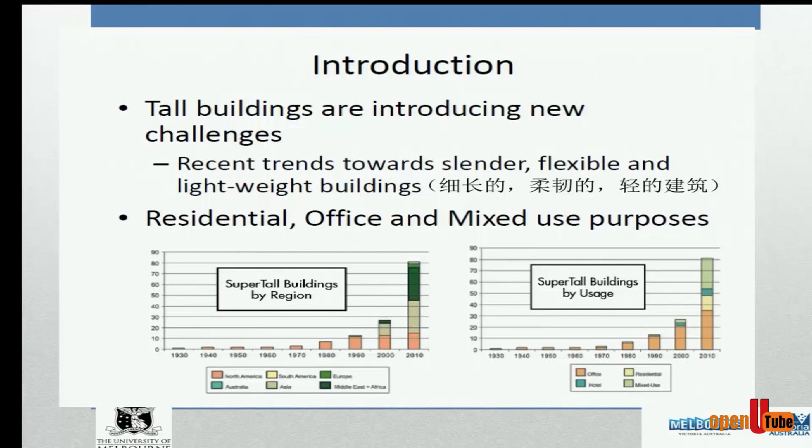The epicenter is moving from where the super tall buildings were in North America before, now it's more in the Asian region. Sri Lanka, we were told in Dubai, Mr. Jamal was also there when we attended the tall building conference, and we were told that Sri Lanka is one of the most active places for tall buildings. So we have to be very proud of it. The epicenter is changing by region.

Again, as a usage, I mentioned that we're moving towards more mixed use. We can't ask the client - maybe we have to ask the client what do you want to do, but then he will change his mind halfway. So anyway, the shapes and all that.

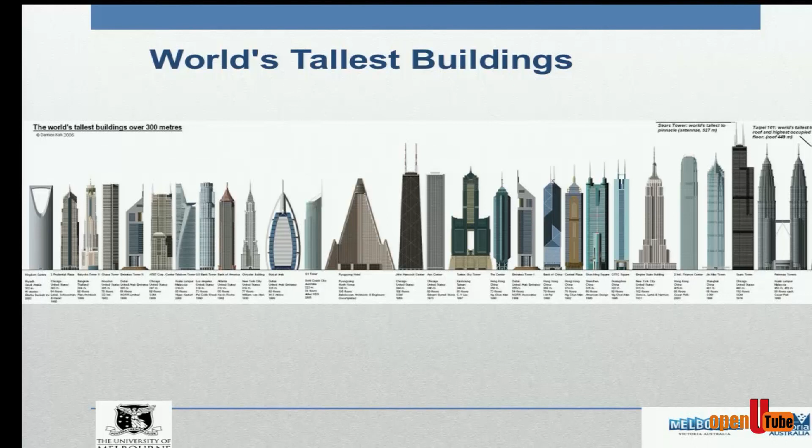World's tallest building, the Burj Khalifa - again I will show my involvement with that. And then the Shanghai Tower, you can see the shapes are changing, always changing. The main task for architects is first to say we want a building which has not been built anywhere, we have to be different. So the shapes have changed as well.

All this is important, where it's heading now. Those days, my first experience as a designer, early 90s, was a 200-meter building. I was a junior engineer, even the project engineer for the site, also in charge of the core. But that was early 90s, a 200-meter building.

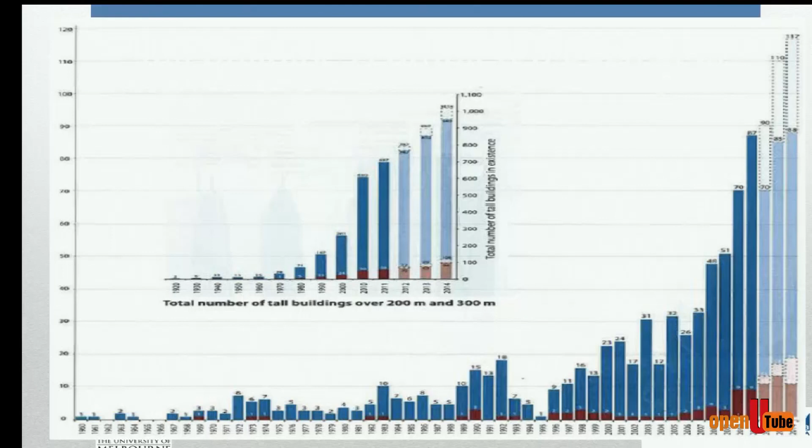But now the trend is 300 meters is really like the norm. People will be asking the question now about tall buildings - clients will be everywhere asking why not tall? Those days, the question was why design a tall building? It's the other way around now.

The clients are saying I want the tallest building which can be built, because there are numbers - these are business decisions. We know we're running out of space, running out of land, which is obviously getting more and more expensive. So the best way is to really go higher and higher. So it's not the designers asking can we build a tall building, but now the clients are saying we want the highest, because, sorry to repeat, it's a business decision - going taller is the best option, and your return is a lot higher when you go taller.

So Colombo, Sri Lanka - as I said, the skyline has changed so much in the last many years, and we have a huge opportunity here. Port City will be built, and there will be many high-rises coming up. It's an exciting time for the high-rise designers and the builders, as I said, for the students who are working in high-rise.

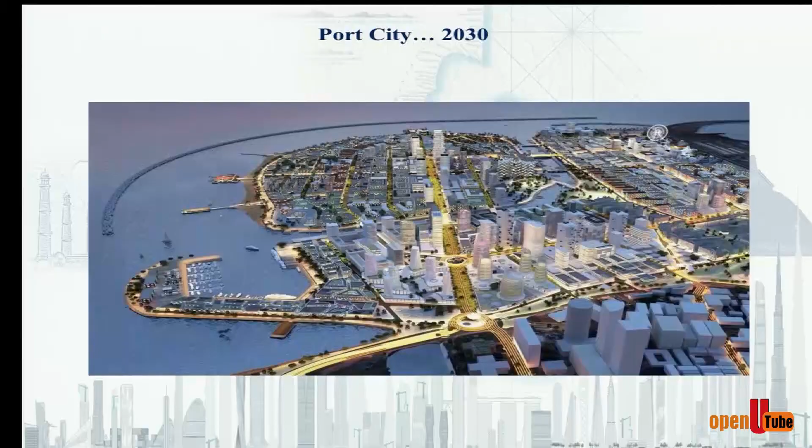In fact, I started the high-rise structures course - probably one of the first in the world. This is a long time back, mid-90s. As a junior lecturer, I started the high-rise structures course. It's still running, and the thing is, it's a special area - it's not really like going and learning concrete design or something. It's very important, but high-rise is again, for students and engineers around the world, a specialist area.

So no one can say that if you have not done a design of a tall building, if you have not done construction of a tall building, if you have not supplied materials to tall buildings, you can be involved - you need that experience. It's a specialist area. There are problems - I can't name them, I had a call 2-3 days back. I will ask you to look at the web and you will find it.

There was a problem in a building in Sydney a few days back. Again, because it's on the web, I can't name it, but I'll leave it as an exercise to find. The whole building was evacuated because there was a failure. It's dangerous - if you don't do that properly... maybe I'll stop short of saying why I was asked to be involved, but anyway, these are really very important to figure out, and it's going to the courts, big things happening there. If you look at the Sydney high-rise failure of a building, you will see that.

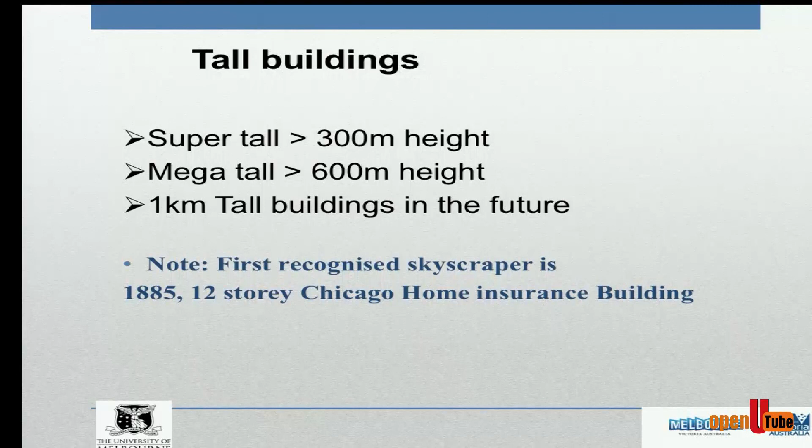The first recognized skyscraper, in 1885, was the 12-story Chicago Home Insurance Building. I remember growing up in Colombo, the tallest building was the Ceylinco Tower, and we used to go say, this is the tallest building. There may have been a lift, I'm not sure, but going up the escalator was something we really enjoyed. We had to pay for it at that time, going up the escalator, but now it's free. So the goalposts have changed all the time, and they will keep on changing.

I had an archive photo from Melbourne of a tall building, a 2-story building from around the 1840s, which at the time was considered a tall building, just 2 stories. So we can see how the goalposts have changed.

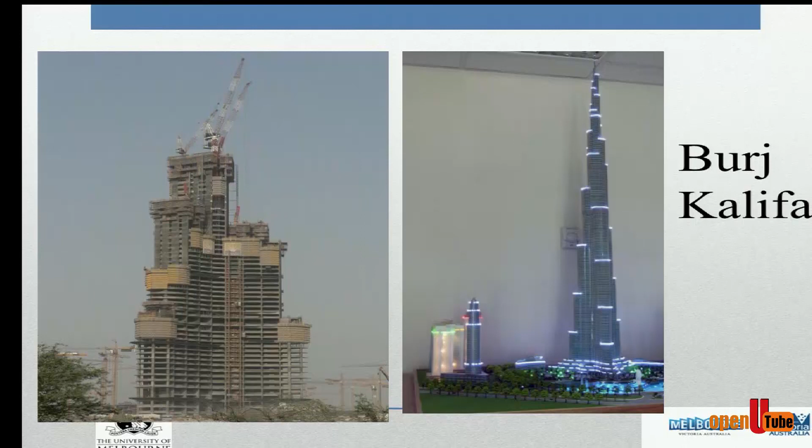Burj Khalifa is really a structure which changed a lot of things, and we were privileged to meet some of the people involved in Dubai a few weeks back. Then there's the Shanghai Tower, the second tallest building in the world, which brought new techniques like computer parametric design. It's twisted at every story to get the best performance from the wind, and some new techniques have been found. These are the 3 buildings I like the most in the world: Jinmao Tower, the Shanghai Financial Center, and now the Shanghai Tower. It's 630 meters tall, twisted, with some special features.

I was there when they topped up the concrete. A friend of mine was the project director there. The communication I had with him before was about this: I think it's one of the tallest pumps of concrete, you can't see it, but 506 meters. So that exercise, I was there when they were pumping concrete to the top level. It was really good to see all that.

Because of limited time, I'll move to this now. The design approach has changed. In those days, we had the material supplier giving us concrete and saying, yes, we'll try to pump this to 500 meters. Now it's different, we work by looking at the performance required from the material, and then we design the material accordingly. In this case, we wanted to pump the concrete to 506 meters, that was the performance criteria, and then you work backwards to come up with the best mix.

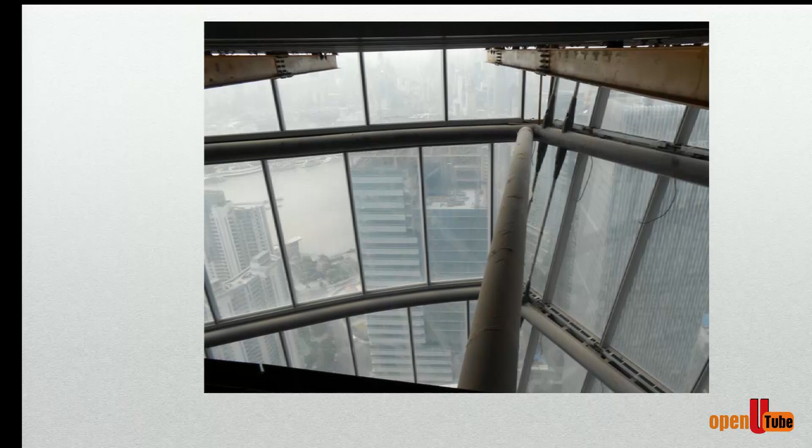Another feature is the double facade, which is becoming popular, not just a single layer but double facades, for thermal reasons and others, easier to clean, and even aesthetically considered better. We had a big research project on double facades over the last 5-6 years at Melbourne Uni, sponsored by Permasteelisa, the biggest facade company.

I've noted down, because of limited time, I don't want to take all the time, so I'll just summarize the areas where we have progress, where the world is heading. I'll show some slides later on wind engineering, aerodynamic shaping, and virtual wind tunnels, that's one direction we are heading. The world has changed over so many years. Fire engineering is also key, and that is currently restricting the height of buildings.

If you give it to Mr. Shomal, he'll design a 2-kilometer building if you want. We've got the foundations and the techniques to do things, but it's really the fire engineering which would restrict the tallest height. So I'll give some comments later on.

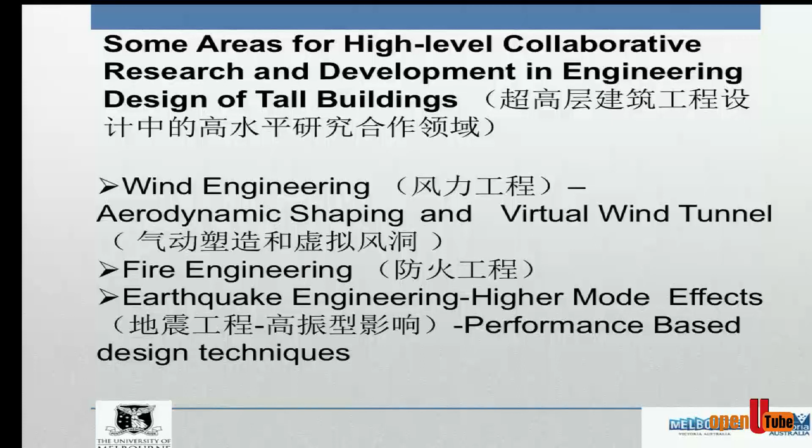Earthquake engineering, higher mode effects are there - if there are any questions, I'm happy to answer, but the higher mode effects have to be considered. Computers have allowed us now to really use performance-based design techniques, so there are recent developments covering that.

At the construction site, advanced formwork systems are coming. We also want - that's where I'm leading this center in Australia, the Modular Construction Center - and that's where the world is heading in the next 10 years. A lot of things will be prefabricated in the factory, so I'll say a few things there. And the vertical transportation systems have to really have some modifications.

Advanced materials - as I said, we are designing the materials, high performance, high strength, working on changing them. We need to change the design codes, because this is totally different.

The Australian code, which I have been involved with, I think I've become one of the most senior members now in the code committee. I introduced high strength concrete to the Australian code. At that time it was only 65, then we brought it to 100, and now we went to 120. Next revision, we're trying to go to 150 MPa concrete.

And so then we need the composite materials. Again, as I said, design the materials - we don't need to worry about whether it's concrete or steel or composites or nano materials. Just get the best out of the material. It can be a hybrid material that gives the best performance for the structure, rather than worrying about whether this is a concrete building or a steel building.

There are other issues as well which I won't spend time on now - we need to increase the lift travel. There was some discussion in Dubai this time at the conference.

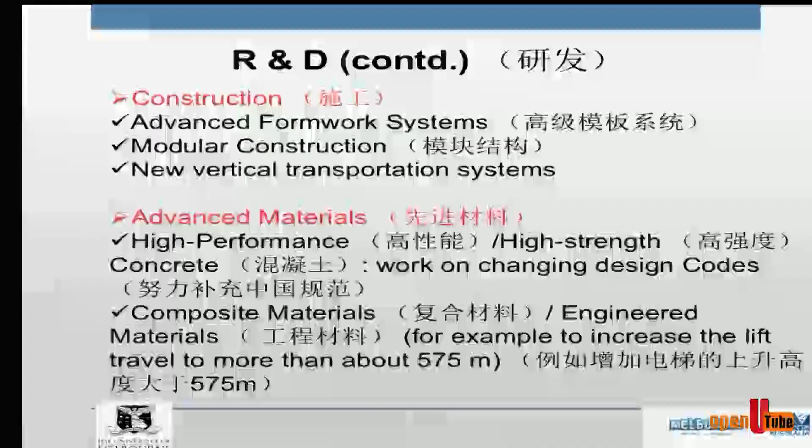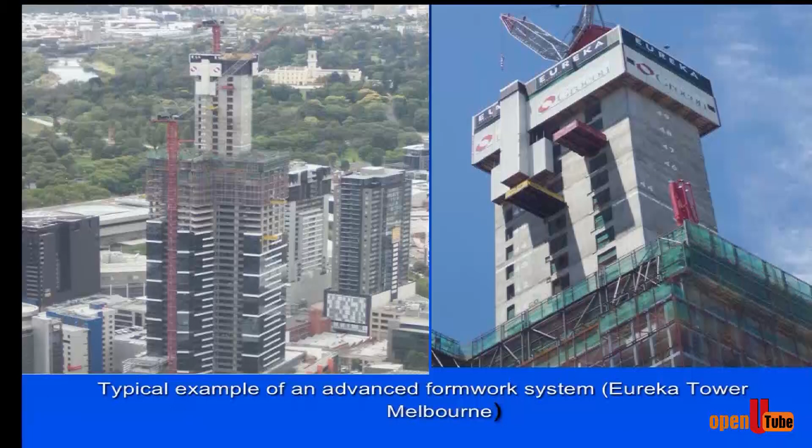Let's go through very quickly some of the innovations - new formwork systems, Eureka. Again, I was involved from the beginning, though I'm not the one who innovated this system. We had to make some adjustments for the design - it jumped 2 stories, before it was only 1 story.

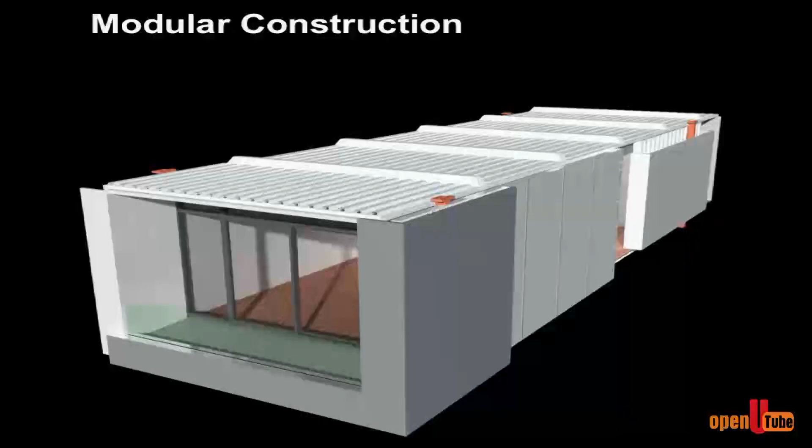This was the first in the world to really go into this, looking at advanced formwork systems. Modular construction, as I said, the world will become prefabricated. Again, we had a short course on modular a few days back in Colombo. It's like the best engineered product in the world is a plane, if you set aside the rocket. What we are doing now with buildings, we are following that.

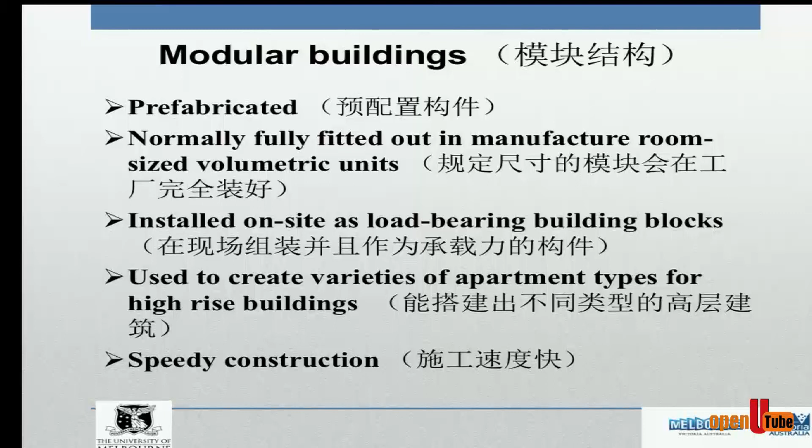It's a product-based approach. In the future it will be done in a factory, brought to the site, and put in on site - this maintains the quality, and that's the advantage of modular buildings. It's all prefabricated in a factory, normally fitted out as manufactured volumetric units, then used to create varieties of apartment types in high-rise buildings, with speedy construction. Construction speed is key now for everything, and modular really brings that.

Just one example - I was very privileged to follow this from the beginning, the construction of this 44-level building with 206 apartments, and these are the modular units. These modular units were done in a factory, and I gave more details in that short course, but today will just be a summary.

The modules are now designed and broken into modules, done in a factory. See, these are the modules. Weight is a key factor. Even the bathroom pod is done in the factory and then put in there.

An advantage is there were rollers here, so there was some flexibility for the architects - they could change their mind and say, I want the bathroom here. So these sort of new things are coming up, very interesting. Again, I'm privileged to lead the main center in Australia - I think it's probably the only one in the world, an academic institution focused on modular construction.

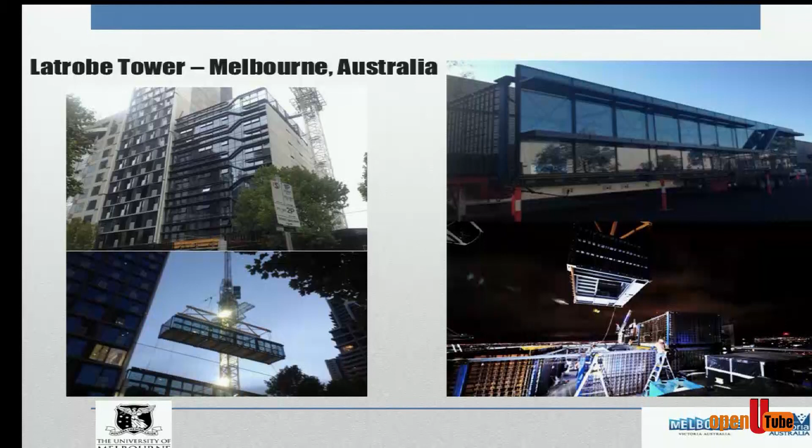So this is the Latrobe Tower brought from the factory. They got special permission to do it at night because transportation is key. I'll show a very quick video of that rather than trying to explain this technique.

Hickory, the company, is very innovative, and they are helping in the center as well.

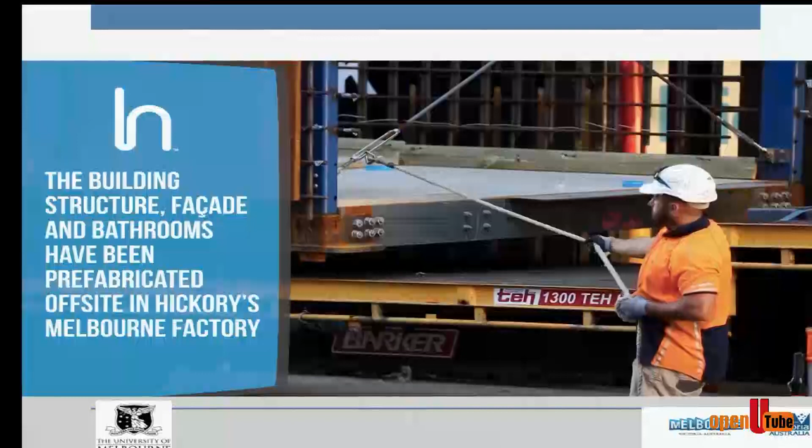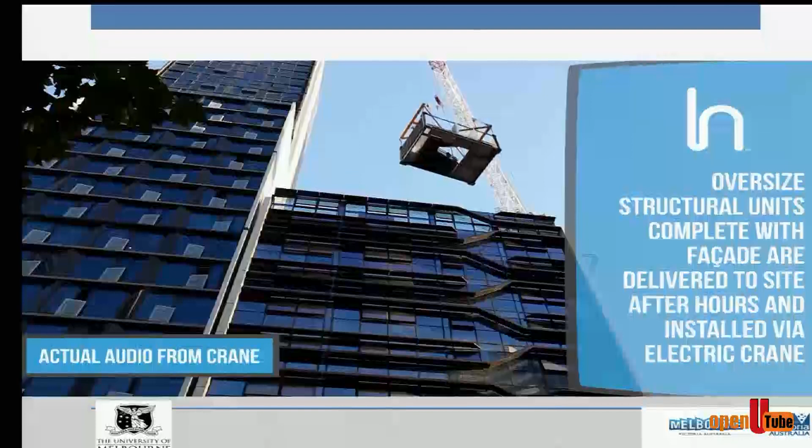So it's really very, very quick construction. Just to save time, I will expedite a bit the video.

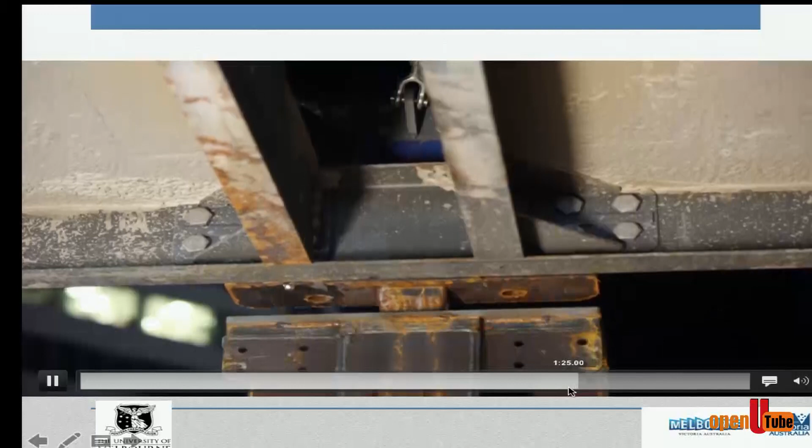It's very clean around the site, and it's done very quickly. There was a next door building we started long before with traditional construction. This beat it by so many months. So it's really picking up a lot, and this will be very quick. Again, a video of the time-lapse video.

Be very quick of the construction, which really brought some innovations.

And there's no disruption to traffic, or very much less disruption, and as I said, it's done mostly at night, and sometimes there's no interruption even to the people working in other places next door.

This again is a prediction I have made, and I think in 10 years' time, the majority of production will be done in a factory and brought into site around the world. So that's a major trend.

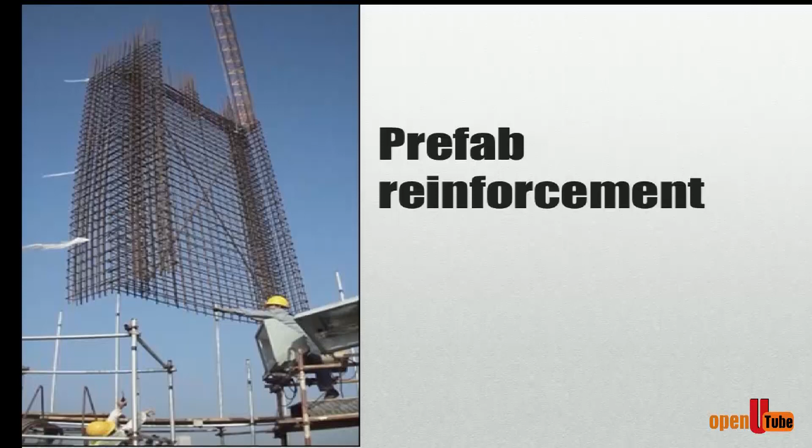Mr. Shomal told me Captain Kuratna used that in the Celestial site for the first time. I think it could be the first time in Sri Lanka. We used that, and to say the Chinese builders didn't know - I remember myself and Mr. Shomal talking to them in Beijing, telling them you can save a lot of time and go for prefab reinforcement, and I think they really adopted it and acknowledged that we helped them make it.

Anyway, other ones I will go through very quickly. These are some of the things.

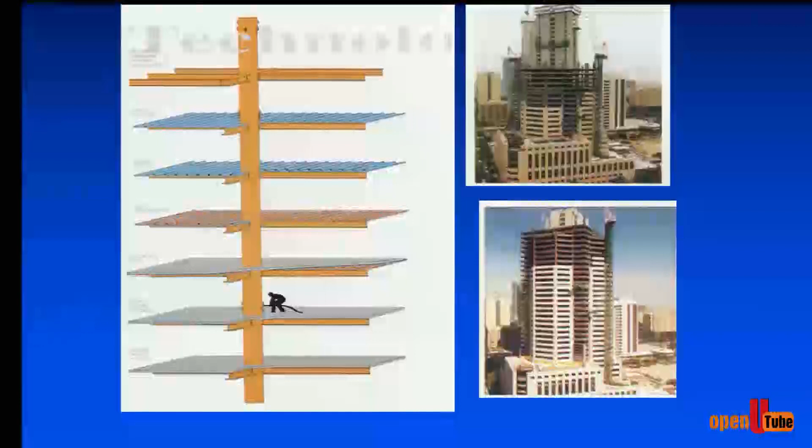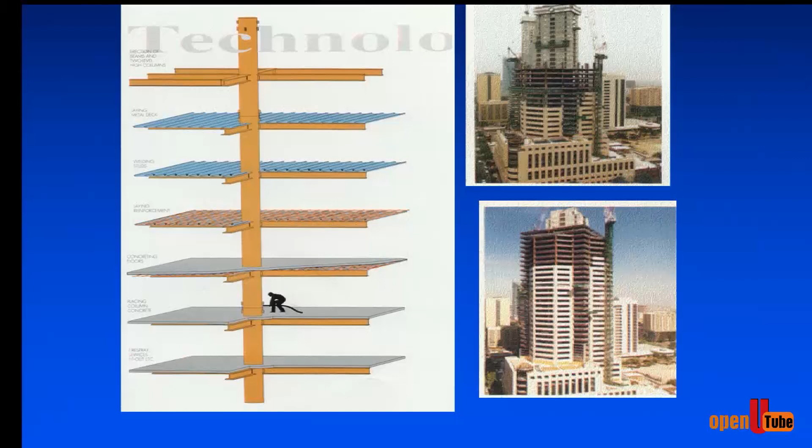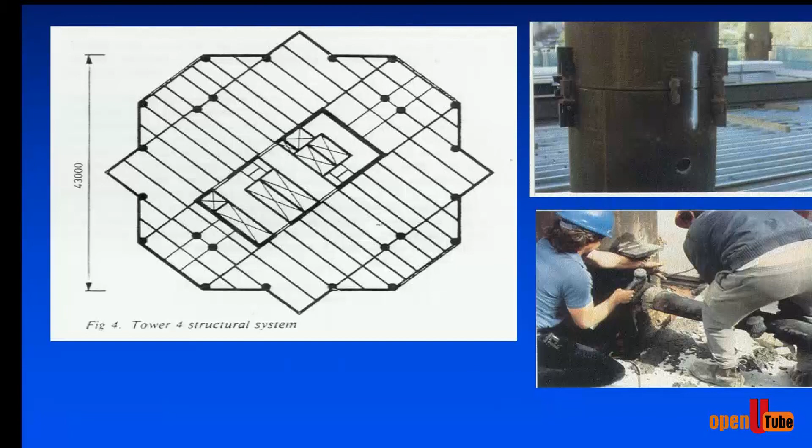In the early 90s, I designed these composite columns, came up with a system to pump concrete from the bottom four stories up, and that building is one of the major buildings, the immigration building in Melbourne. These are the beginnings of all that, still the composite columns, and at that time we didn't have all the technology - we were just wondering whether we could pump four stories up from the bottom. Somehow we did that.

And other things are coming up. Very briefly, cranes - they have to be very carefully designed, because what happens is you design the structure, and then sometimes they want to join the crane at different locations. They change all the time, so you have to be very careful about that.

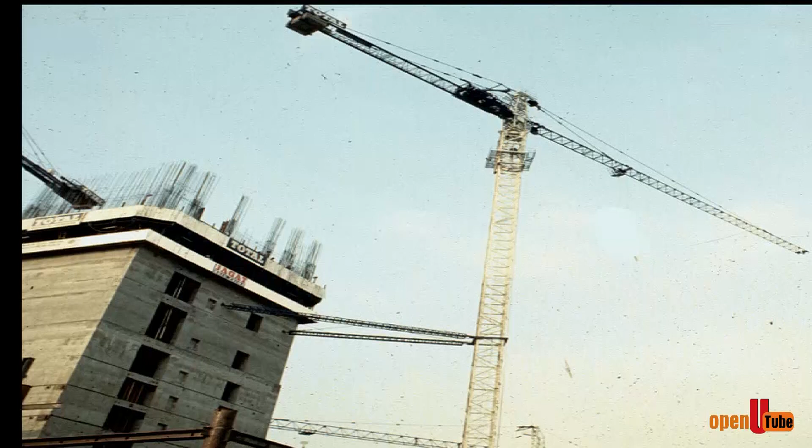Why I put this slide is the crane technology is changing. In a few years' time there won't be any crane drivers. I don't know about Sri Lanka, but crane drivers earn more money sometimes than engineers, because they have the height allowance, the risk allowance, all that. But what's happening now in the world is remote control cranes. Already that technology has come - mobile cranes with no operators. So safety is there as well, and that's what's going to come in crane technologies.

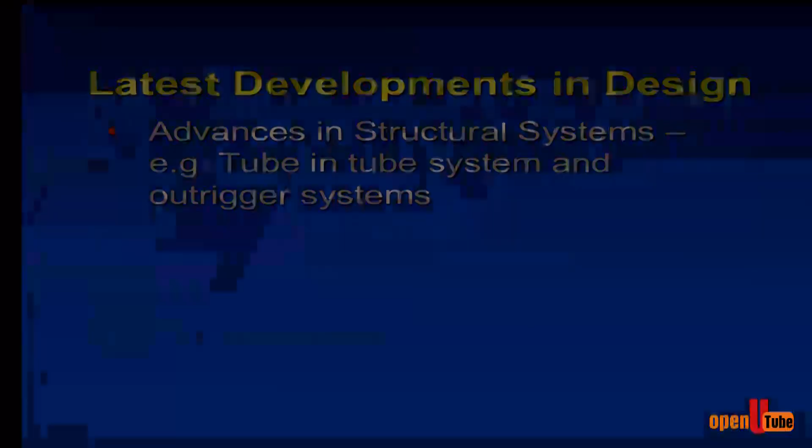Again, the latest developments in design - I will not spend time on this, but the outrigger system has been designed here. It's really a simple technique: one plus one is more than two. If you have one element here joined with another, one plus one is more than two. It doesn't work with people sometimes, but at least in this structure it works very nicely.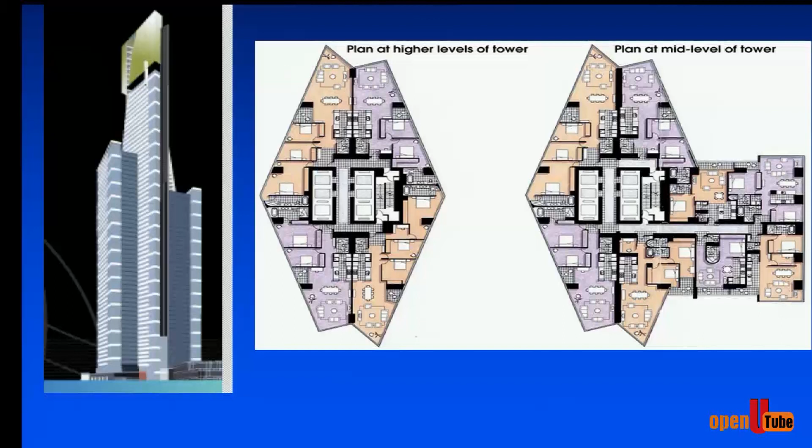So it was used architecture, that shows the importance of integration - that's another thing happening in the world. Building information modeling has facilitated the integration of the disciplines - architecture to the engineering disciplines, structural to mechanical to building services, all that together. So integration is key from the beginning.

The improvements to concrete technology is close to my heart, this subject where, as a very young engineer, I worked on a foundation. I consider him as my mentor in the technology - Ken Day was one of the best in the world. He designed the concrete for the foundations, and he got me involved in that.

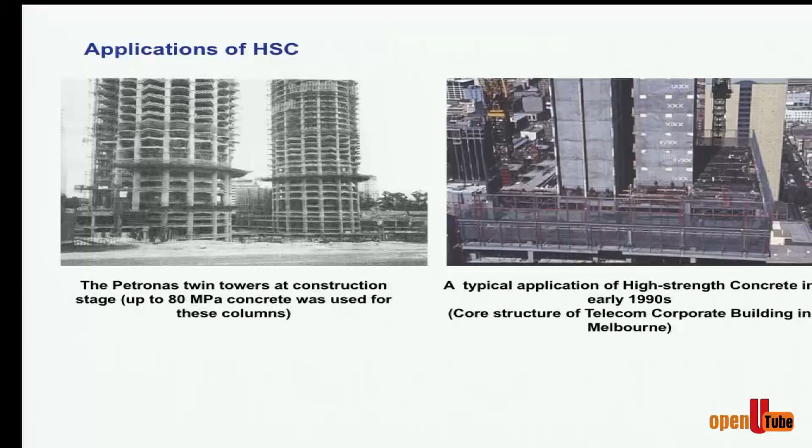As a young lecturer, we were doing some tests - so really early days, 80 MPa concrete. I was acknowledged last year, getting that award, as the first person in Australia to use high strength concrete in this particular building. I used 65 MPa as a young engineer. These are very proud moments for me.

And then getting to the Burj Khalifa, which is really the work of R&D - that's really for academic. The most proud moment is if we can use our research and then have it used in key buildings or key structures - that'll be a very proud moment. Using my work in Burj Khalifa to design some of these columns, the confinement work I did for a long time.

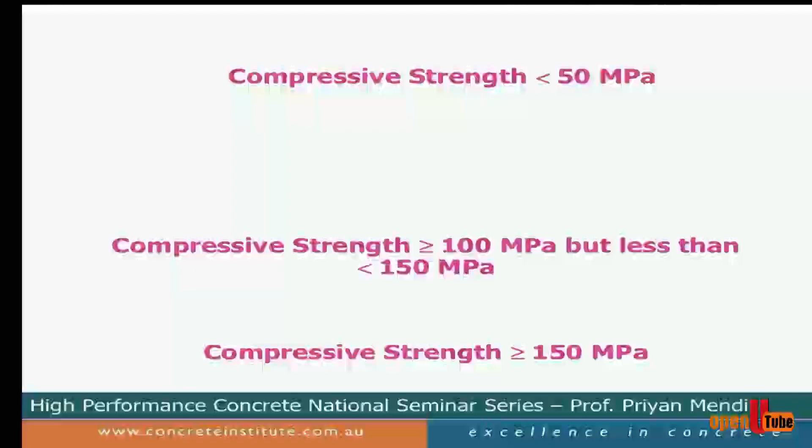I won't go through everything, but as I said, from 50 MPa, we are now in Australia using up to 150 MPa in commercial concretes, so we are getting to this engineered very high strength concrete. Engineered is the word - we need to engineer the concrete to get all these properties.

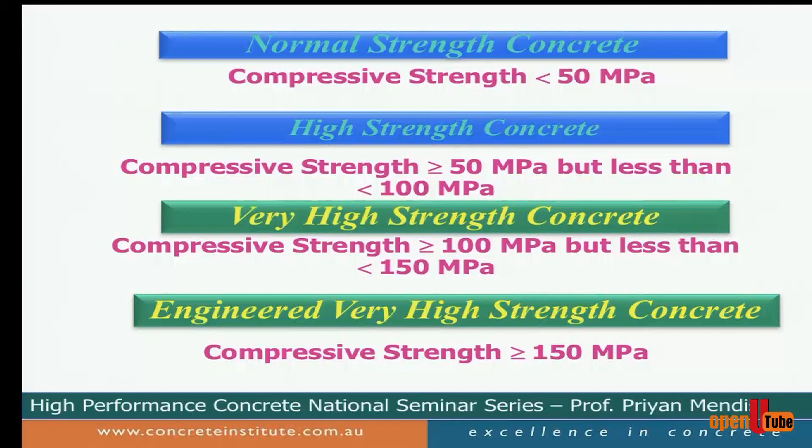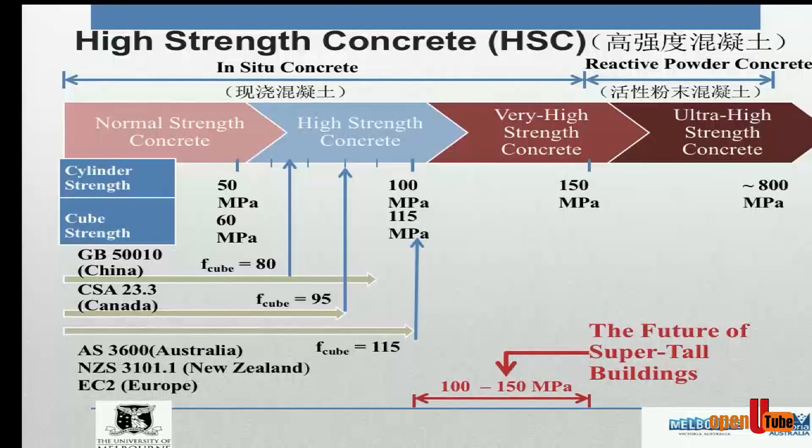I tried to skip this slide, but we need to do a bit of work on the codes. We still need to really develop this 100 to 150 MPa range and codify them properly. There are students here - it breaks through the aggregates. Aggregates are the weak link in high strength concrete. Normally it's the paste that breaks - the weakest element is around the aggregate, the paste. But when it gets to high strength concrete, it breaks through the aggregates, because aggregates are the weak link. So it's a totally different behavior.

The stress strain models - high strength concrete is not always something you can just go and use. It's very brittle compared to other concrete, so you need to be very careful about that brittleness. Stress is on the y-axis, strain on the x-axis - see the high strength concrete, 80 to 100s, becomes very brittle. We have explosive failure when we test them in the lab.

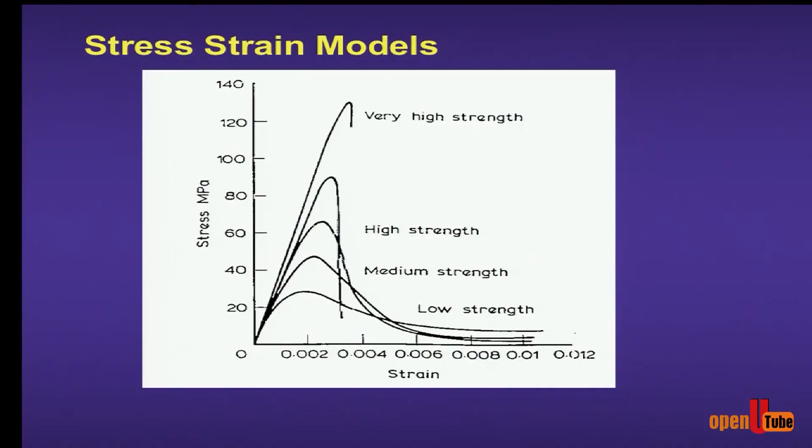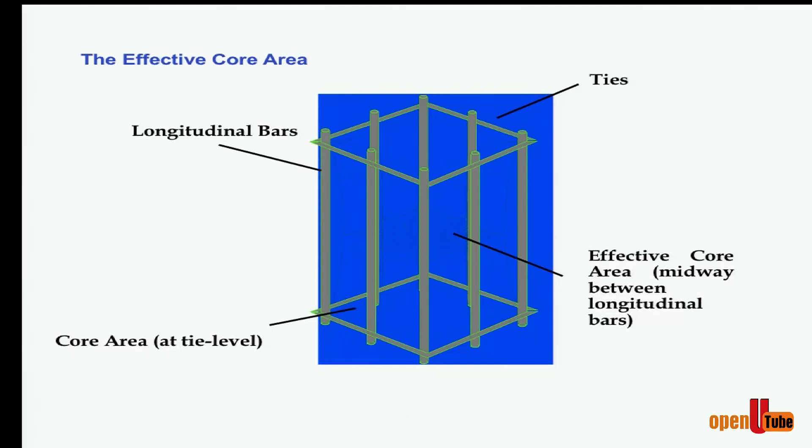This is the pioneering work I did at that time, trying to reduce - now a few people have picked up and done research, but ours was very early work - trying to reduce the spacing of the stirrups or ligatures, as we call them, in between, so that you get extra confinement.

And the latest developments in design - wind engineering. I'll be running through these slides quickly rather than in detail. There are many new developments in wind engineering and wind tunnel techniques.

Everything depends on how it's governed by the perception of motion - how you feel going to the top of a building, how you feel. It's like going in a boat - we know we don't want to go, we get seasickness. So it's similar to that. Buildings are getting taller, and when you get to the top of the building, we may get sick because of that type of phenomenon. So acceleration is key, which really governs that.

We need to do a bit of work - it's very crude to just say acceleration. Now we need to go into another level and see, is it the acceleration?

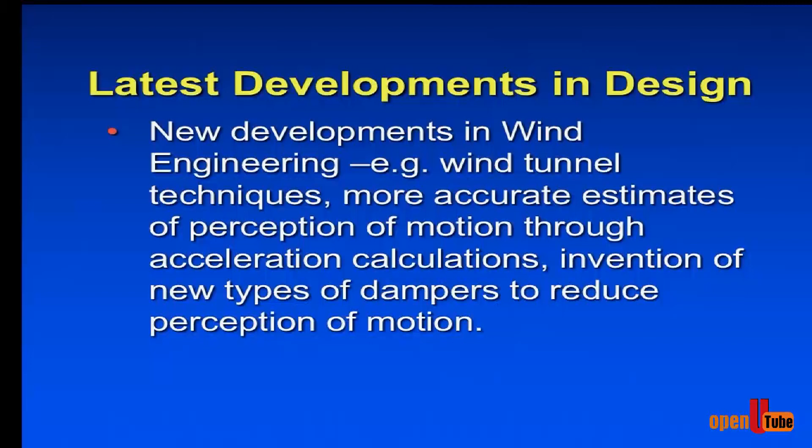There are other effects as well affecting that perception of motion. But up to now, we just got some charts, said yes, acceleration, limit the acceleration, done. But now I think we need to do a bit more work. Is it the acceleration? I'm working with Professor Kenny Kwok in Sydney University, one of the pioneers in this work, trying to see whether there are other parameters. There are behavioral parameters. That's why we need multidisciplinary work, because we have to work with psychologists. There's no point just engineers doing this work. That's why places like Open University are important, because you get a mixture of many disciplines brought together in a team.

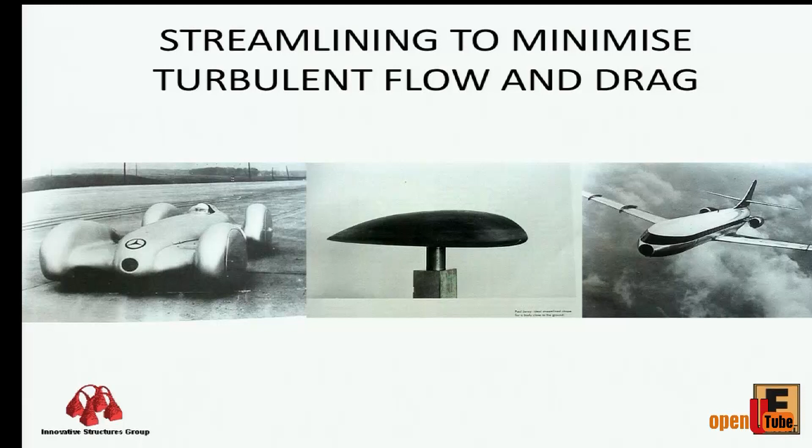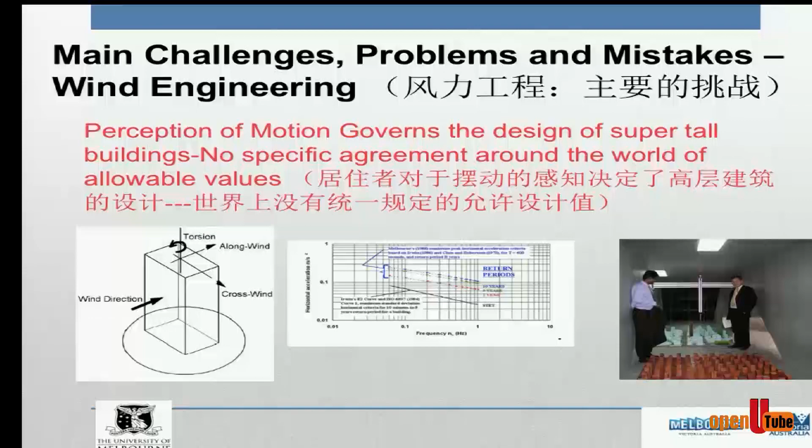I'll skip some of that. We need to learn from Formula One. I followed Formula One from the beginning. It's really from that to planes. Planes are, as I said, the best engineered structures. Why can't we learn from all that they have done and apply it to buildings? That's what we are trying to do in the world, and we will see more and more. Shanghai Tower is a good example, and the wind tunnel techniques - I'll skip that.

Once it becomes a tall building, the crosswind component really dominates sometimes. It's not the along-wind parallel to the structure, moving parallel to the wind - it's the crosswind, perpendicular to the wind, which really vibrates the structure due to vortices and all that. This isn't present in a low-rise building. I will not go into fundamentals today, but it's very important to understand them - it's a totally different game when designing a tall building.

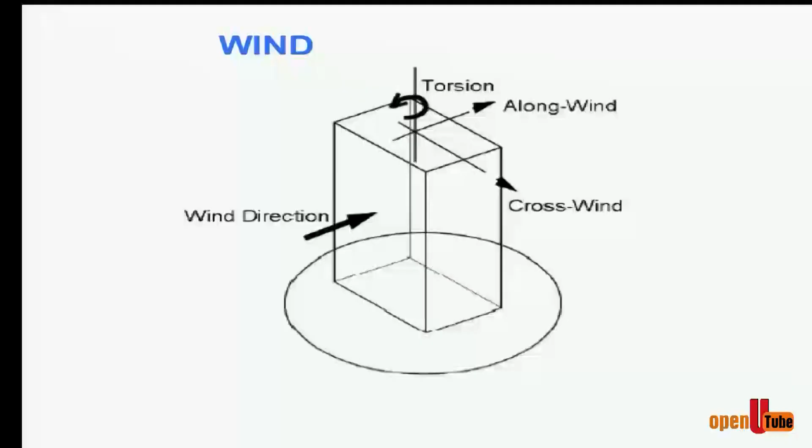So I'll skip the allowable values. There's a paper on the web - if you search tall buildings, wind, and my name, you'll find it. I heard it's supposedly broken records for downloads, the highest downloaded paper in our field, though I don't believe all that. But the horizontal acceleration on the y-axis, frequency on the x-axis, with the flow over a building model - that's computational fluid dynamics.

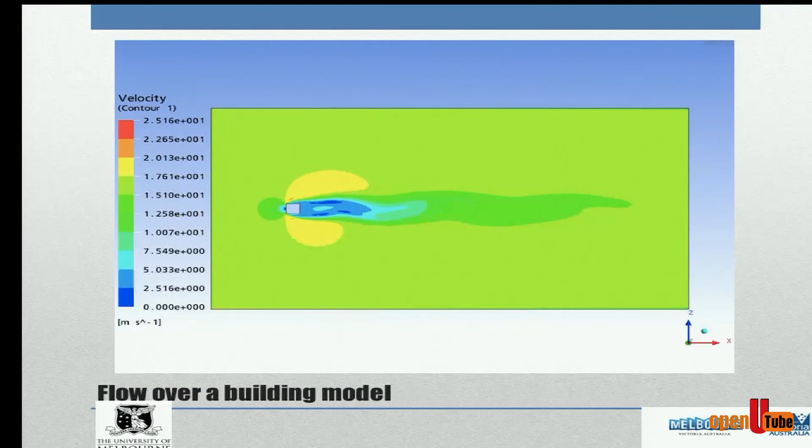The computers have given us this power. When I started my career, my hard disk was only 50 megabytes as a lecturer. Now what is that, 50 megabytes? I think I have a 50 gigabyte USB here. Things have really changed. Why not use the computational power now? It's really taking it to another level.

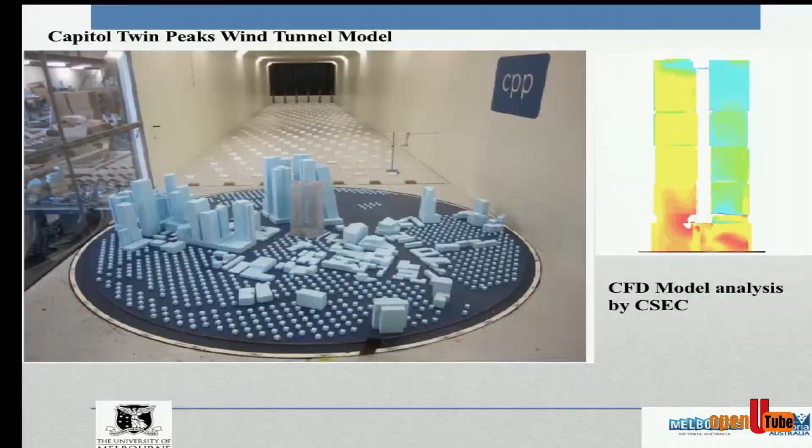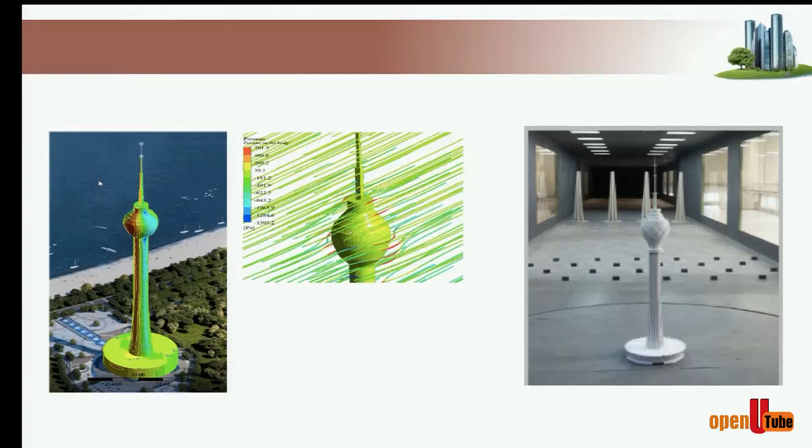That's coming from here - Capitol Twin Peaks wind tunnel model, done in Australia. And that's the CFD model developed by CSEC under the guidance of Mr. Shroman. So some pioneering work has been done here - these comparisons of real wind tunnel to real CFD, I don't think many have done that. So this is the Lotus Tower work - from day one, my involvement with Mr. Jamal also with the Lotus Tower. This work was done in China. We visited the wind tunnel and got the comparisons - this is the work we have done.

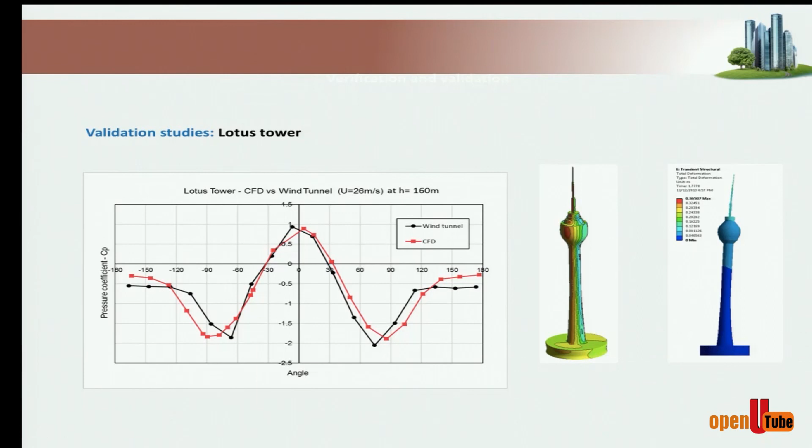There's a video - I will not spend time running through the behavior. So really, we have got the techniques now, and when we compare, it's not too bad. The CFD gave results close to the wind tunnels. So now we can go into virtual wind tunnels and all sorts of things. I had two PhD students working on it as well - it was a challenge to work on the fatigue and many things in the Lotus Tower.

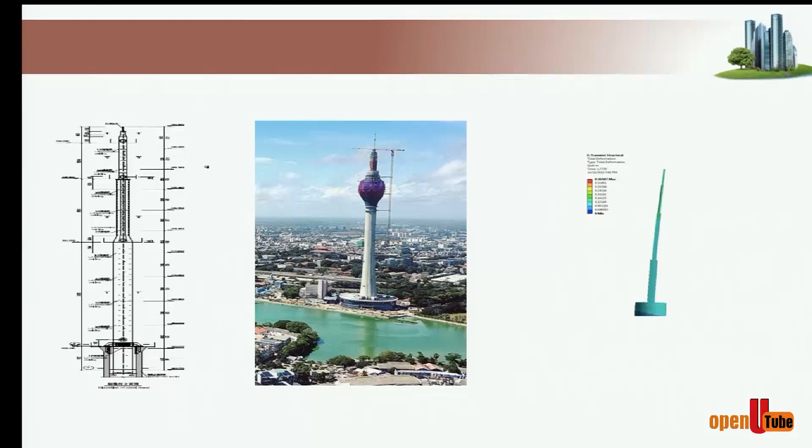There was - but the most pioneering work is this one kilometer tower in Dubai. As I said, I will not spend time on it.

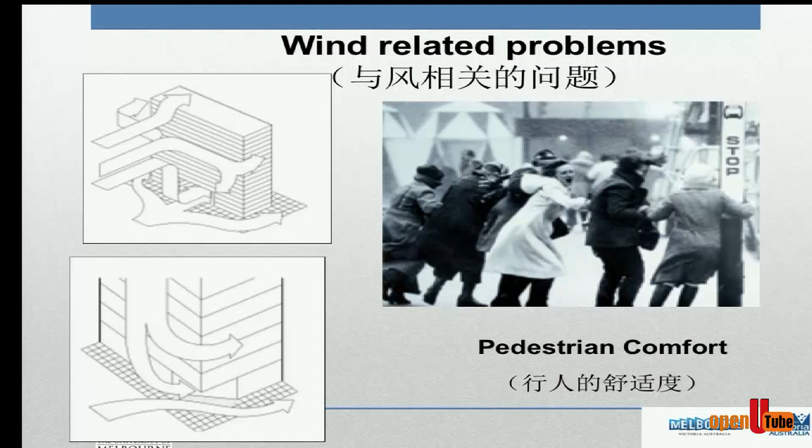The other thing becoming more important in the world is pedestrian comfort. We are building so many buildings, it's like wind tunnels now. Those days we had only one or two buildings here and there - now every street is becoming like a wind tunnel. There are so many high-rises coming up that we can't even walk. It's happening around the world. It's not yet in Colombo, but pedestrian comfort needs a lot more research - it's really in very early stages. What are the allowable values? There are some crude documents - even we have developed a document for pedestrian comfort, but saying wind speed has to be less than a certain value to be okay - that's not true.

We need to do more R&D work on that. What is the allowable criteria? We had to get that behavioral side, the social side. We had to bring the psychologists, bring all of them into one team working on these issues, not just engineers and architects. So anyway, I'll skip that.

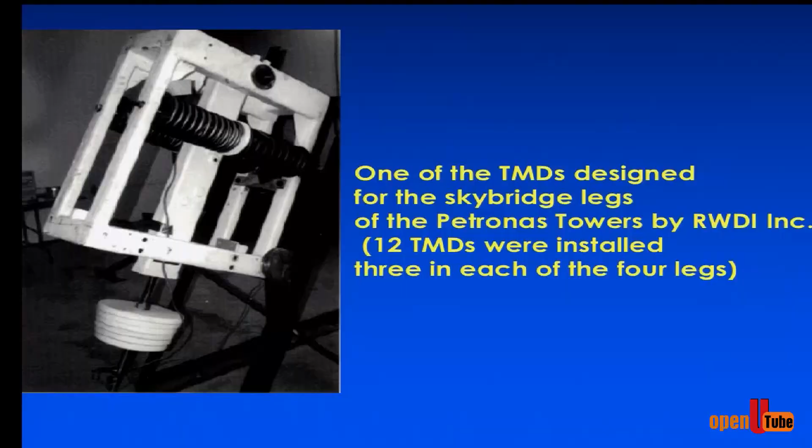Dampers, that's another one. The world is becoming taller and taller, and we need to look at the dynamics. Taipei 101, very smartly they have got this observation tower. It's obvious in dynamics, you put a very big weight on top of something and it will reduce the dynamics. These are obvious things, getting back to fundamentals, to common sense. So here the big mass on top is used as an observation deck as well, very smartly used.

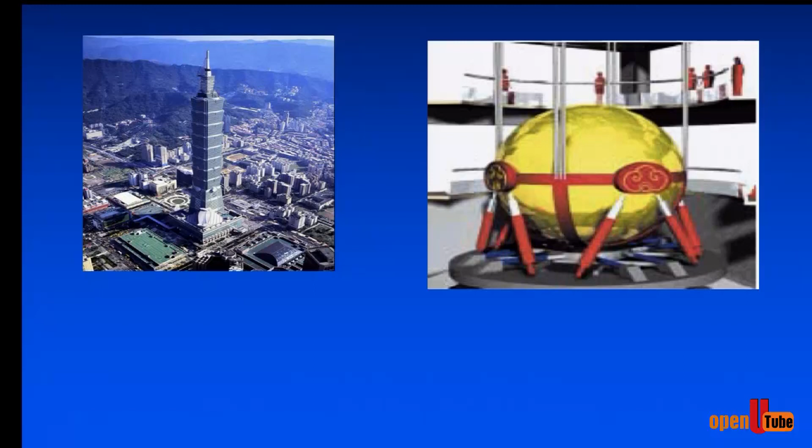So we are moving into that. Wind, one comment we want to make is, if you want to design a structure in wind, what we have learned is: confuse the wind. Don't allow the wind to dominate. Just go and put some different ways of doing it.

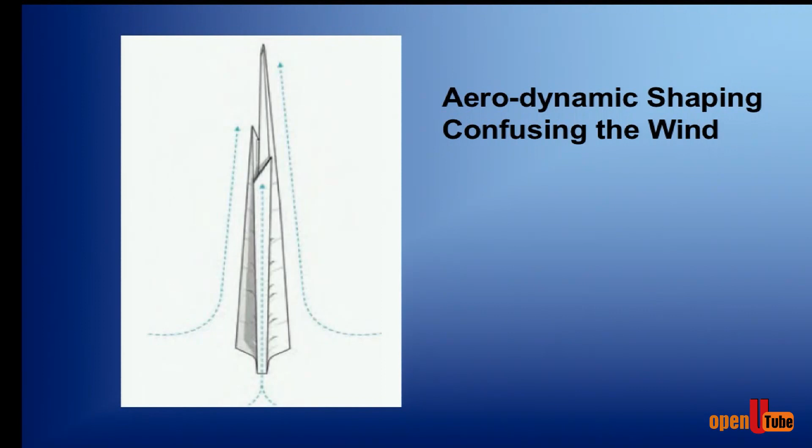This is Kingdom Tower. Burj Khalifa did that as well, and Shanghai Tower, and some structures here also, just confuse the wind. If you bring a very smooth tower, following basic principles, the dynamics will not be the best.

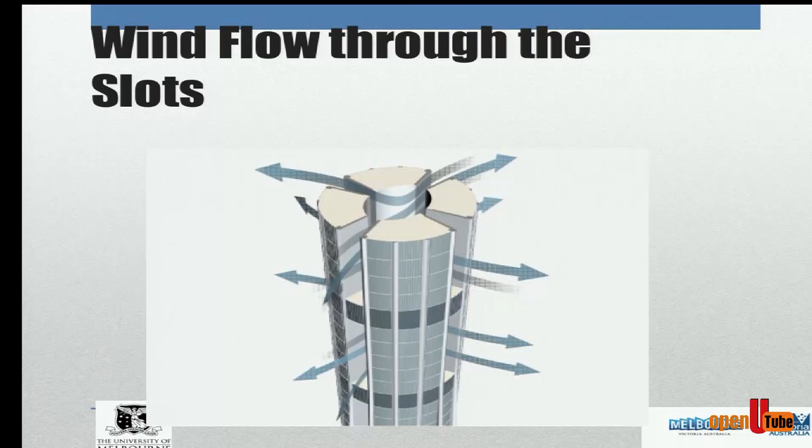So we need to look at that aerodynamic shaping. This is what we planned for the 1 kilometer tower. Unfortunately it didn't work. All the work was done at Melbourne University, planning the virtual wind tunnel work, CFD, and we tried to put some slots to reduce the wind. So we need to be smart.

This is really one of the world firsts, I have to say, what's happening in Sri Lanka with monitoring. That's an area that will progress a lot - wind monitoring, and also the buildings have to be monitored. That's why I'm here sometimes, because I'm very privileged that we can go and monitor buildings. We don't have that option in other countries.

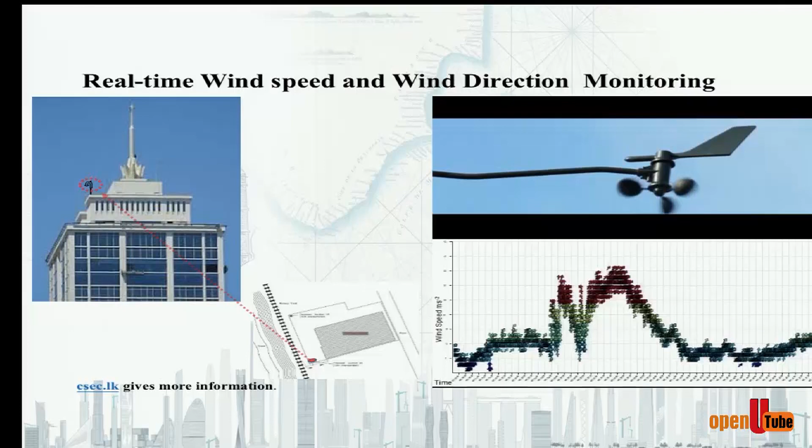There are other issues, OHS issues. Construction managers don't want them to come. In this case, I think Captain has allowed Shiramal to put these anemometers on top of, at that time, the Celestial Tower. So it's really one of the world firsts, where now through my mobile phone, from Melbourne, I can click and see what's the wind speed on top of the Celestial Tower. It's really a huge achievement for Sri Lanka. I haven't seen other countries doing that. So we have some world firsts here.

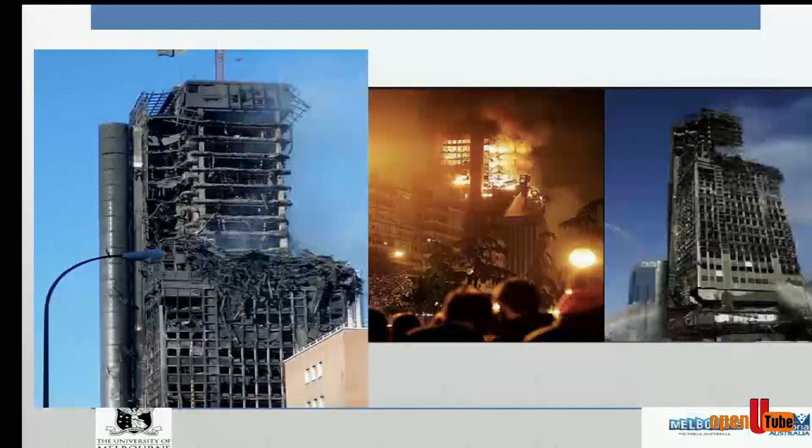So anyway, the new developments in engineering, extreme events, that's where I spend a lot of time. I'll be very quick. Fire engineering, as I said, is limiting the heights of buildings. All sorts of fires were there - we know the Grenfell Tower fire, the facade fire - and we have started thinking about the World Trade Center, which changed a lot of things and brought in refuge floors.

Again, if there are questions, I will explain. But the elevators - those days when we were growing up, we were told if there's a fire, don't use elevators, keep away from that. But now it's the other way around. We can, because these pressurized shafts, the pressurized lifts, have changed the world. So it'll keep on changing.

Why I'm presenting all this is to say this is not the end of it. Next 10, 20, 30 years, all these things will have to be developed further. We still don't have all the answers. Even pressurizing the lifts is not perfect - sometimes the smoke still comes through.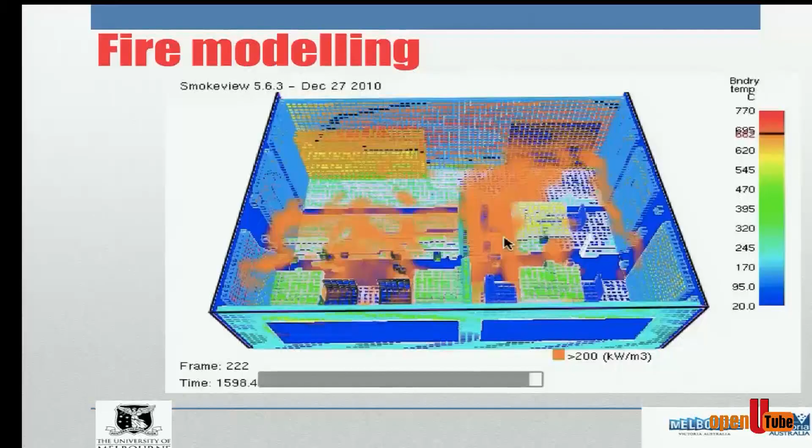If there's a fire, what do you require from this building to really have that fire resistance? Go into the computers, use the computer power. This is what happened after the World Trade Center, especially. Those days we had to use the staircases, both firefighters, and see the destruction here.

Firefighters had to really, couldn't do much. They had to wait for people to come. Now it's changed, and this work, which I'll be very brief about, is egress - how to escape from the building - and building performance and fire protection engineering.

It's a big area where the Innovative Fire Engineering Group, led by Dr. Kate Nguyen, has done lots of work. The Lotus Tower is really one of the first where we did the modeling. I have to acknowledge the whole Lotus Tower team, including the PC unit at Moratuwa University, led by Professor Manavadu, for allowing us to do this work.

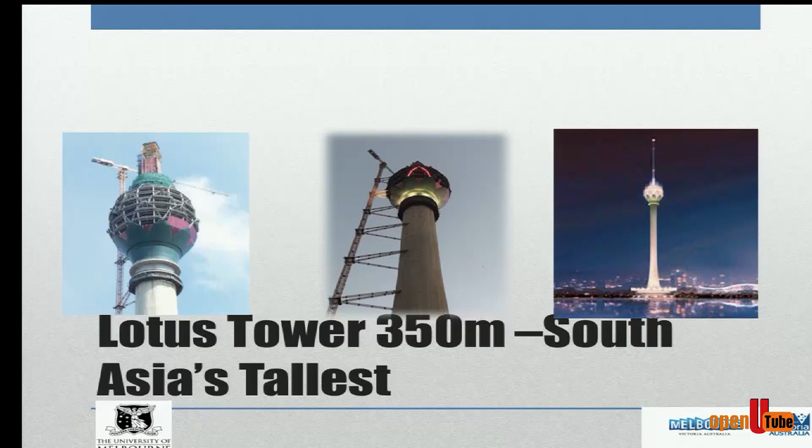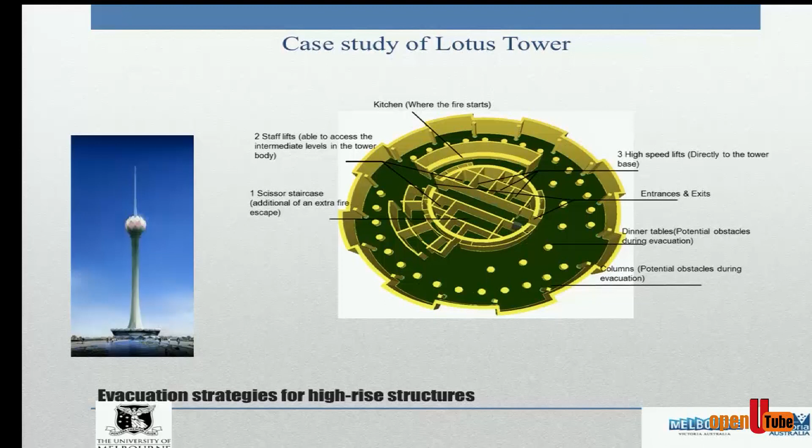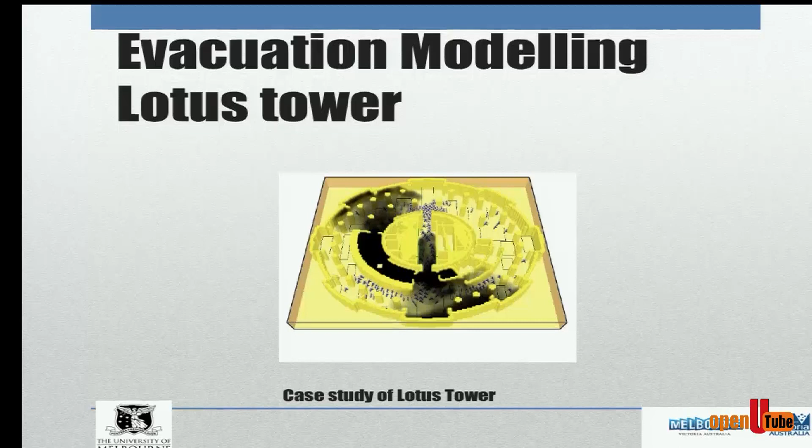The Lotus Tower is one of the first - we did the modeling and managed to make some design changes at that time. It's really one of, I haven't heard of other buildings doing that on day one using the modeling. So that's the kind of evacuation modeling we did at that time - what happens if there's a fire, people start escaping, and so on. We are very proud of that type of modeling done for the Lotus Tower.

This is really a key one - fire performance facade. What happened in Australia and other countries is with the aluminium composite panels, ACPs. There are ACPs here in Colombo as well, on some facades. They are such that anyone can go and light them. I'm sure it's not going to happen, but it's really a security thing as well.

This is something we did as a world first - an 18-meter test, trying to use vertical fire breaks. Now all the facades - there are 5,000 buildings in Melbourne whose facades had to be replaced because they are very strict on ACP. This test was done to show you don't need to take the whole facade out, just have some vertical breaks, replace that and change the vulnerable ACPs, so the fire won't spread to the next level.

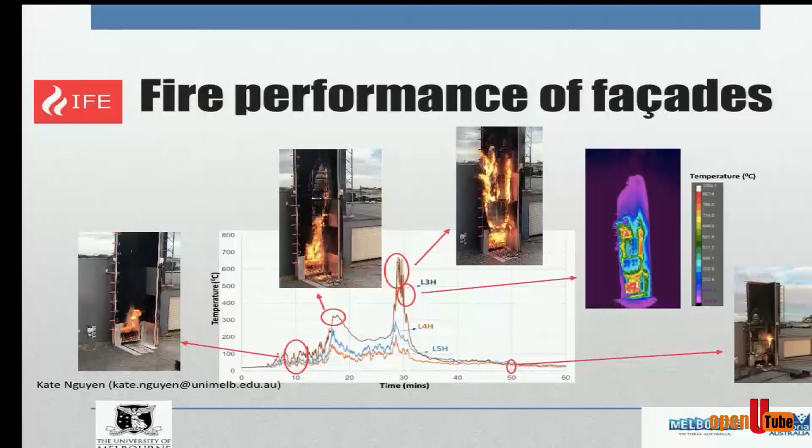This is a real test done there, and that's thermal. We did some very good work on that. Anyway, I will not take time to show that modeling.

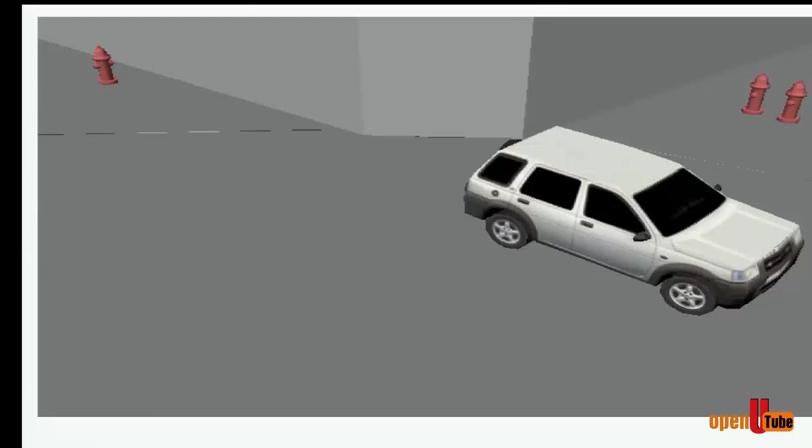Computers have really given us the opportunity, bringing virtual reality and VR and all that, with computer power to model a blast here. It takes a bit of time to load so I won't show it fully, but there's a blast here - this will get blasted - and this was on TV in Australia once.

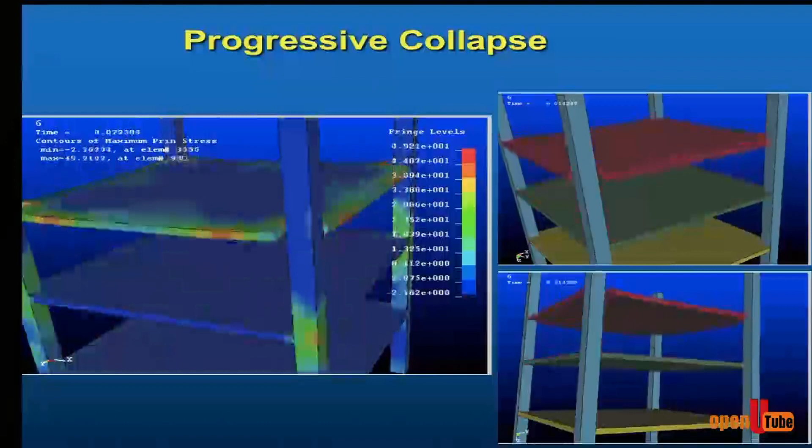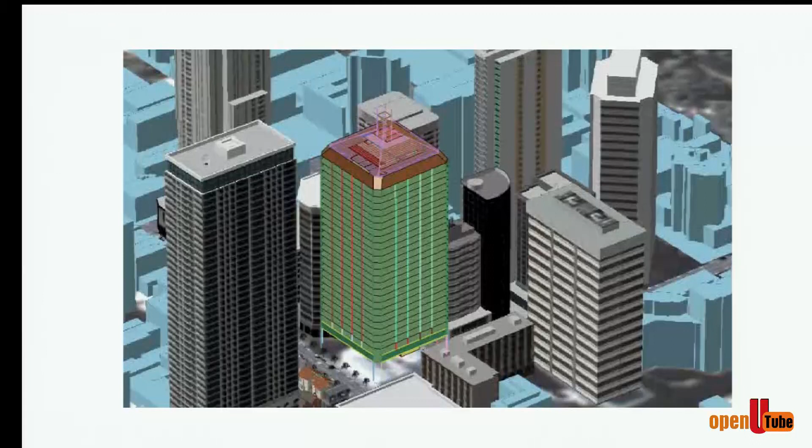Progressive collapse - what happens if one slab falls on the other? Lots of dynamics as well. This is again a world first, modeling a full building where every element was modeled - this is a government structure in Brisbane. See these columns, we have real structures like that. I won't take time to show this one due to limited time, but it takes a bit of time to load and you'll see the building falling. We just took a column out and you can see the building fall. It's really something modeling has allowed us to get into at that level.

Future materials - we need super alloys coming to the high-rise scene. We can't just say it's cement, concrete and steel. We can't avoid nanomaterials, and we were talking the other day about graphene. Sri Lanka is privileged to have vein graphite here, the only country in the world having the purest graphite, so we can use that to our advantage.

As it's told in conferences, Sri Lanka was famous for tea those days, but one day we will become the best at graphite in the world - no, graphene in the world. We really can. The only problem now is that all these graphite companies are controlled by multinationals. They will just take it if you're not careful - just go and take the graphite and go. They are very smart. They've already done that, I think.

Anyway, bio-inspired materials, learning from nature - that's the key, which I've done a bit of work on. Maybe I'll explain that if you have questions. We've also done a bit of work on auxetic materials - that is, as students who've done materials fundamentals know, if you press something it will dilate, diverge, expand, all that.

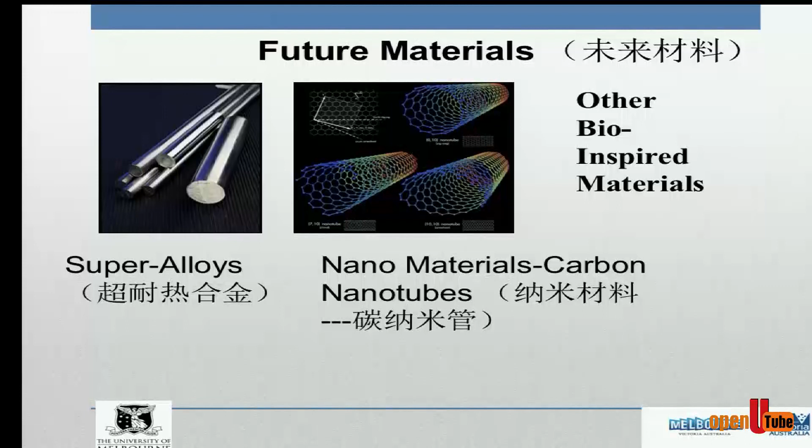Also, recycled materials will come, including municipal waste. We've started using municipal waste to produce some cementitious products. We started that work - that's going to be the next 10 years. We see recycled materials rather than dumping. Colombo also has a big problem, and maybe the Colombo waste dump could become a gold mine one day if it can be converted into recycled materials used in construction. That's still at a very early stage.

I got a project on biomass - again, I won't spend time on it, but if there are questions I'm happy to explain. I just gave a talk, you'll see it on the web, on engineered cementitious materials - a keynote in Milton Keynes about how to use biochar in concrete. So new materials like this will evolve and come to the construction industry.

Tall buildings are really, as I said, there won't be any questions asked - people will be asking the question, why not a tall building? So we have to really use all our knowledge. It's a specialist area, and it will keep going.

There are a number of people here who helped at the beginning for me to come up with the Green Building Council of Sri Lanka in 2009 - it was really a selected group. It's only right to acknowledge Shiromali, who gave me a list, since I didn't know many people - just gave me the list to start the Green Building Council of Sri Lanka. We invited people to a 2009 Galle Face, a famous meeting, and brought about the Green Building Council of Sri Lanka, and we became part of the World Green Building Council.

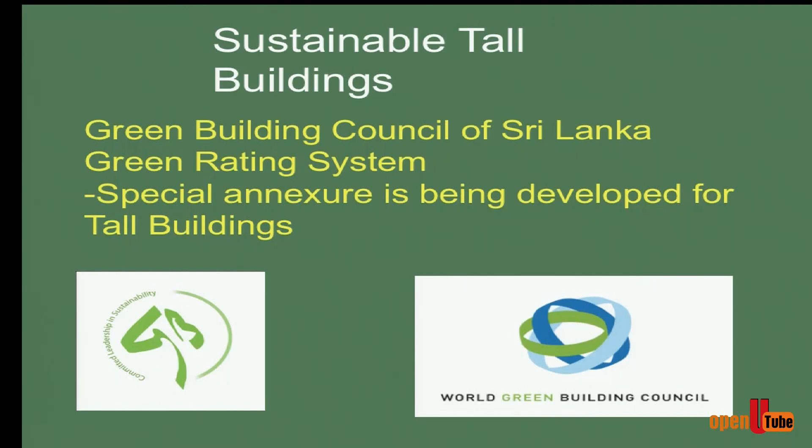That has really changed things - even people are asking the question now about sustainability. Why not sustainability? That's a key one now. Sustainability will come. So, future buildings - just to finish off - the challenge for engineers, architects, and contractors will increase in the future. New generation buildings will be taller, lighter, more slender, and sustainable. These are keywords now even clients are asking about. Slimmer, sustainable buildings have greater commercial value.

Actually, to rent a building in Australia now, you have to have a certain green rating - otherwise you can't rent it. So clients have started asking the question, what is the Green Star rating? I know Sri Lanka is transforming the same way - there are questions about Green Building Council ratings that people will ask now.

Supercomputers have given more opportunities for optimization - a keyword for the future. Artificial intelligence will come in a big way. Machine learning - some of you could be doing research on this. We train the machines. The best machine learning came from smartphones, our iPhones at that time. I don't think Steve Jobs used the word 'machine learning,' but that was his vision - to really make the smartphone at that time. There are other techniques like fractal geometry, which is really about repeating patterns.

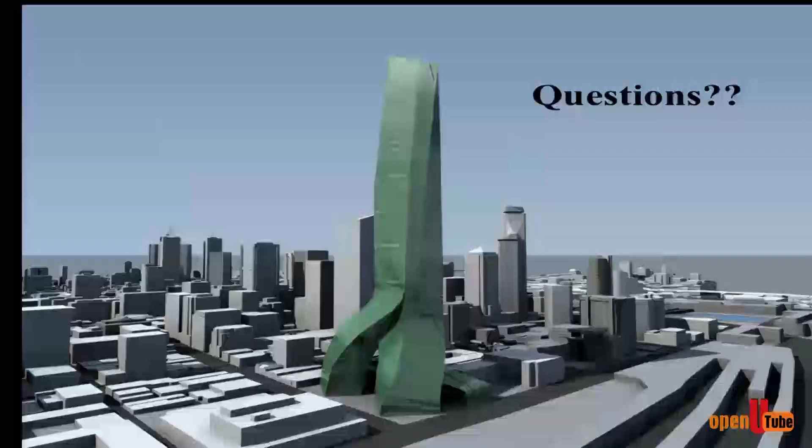Another one is evolutionary optimization. These sorts of techniques will come into tall buildings, and I know some work has been done in Colombo as well on these things. This is a real project we were asked to look at - it didn't come through, but the idea we came up with at that time was to use thin steel plates filled with concrete. It's a real case where architects had a vision to do that, but unfortunately they couldn't find the money, I think. Anyway, it stands out as a key example where we did some work trying to bring innovation into tall building structures.

Those things will continue, and I could talk for hours. But as I said, I teach a full 12-week high-rise course, so today was just very much a summary of where we're heading in the world in the high-rise scene. Again, as I said, Sri Lanka has done very well, and we are not behind compared to other countries when it comes to high-rise structures. I'll stop there.